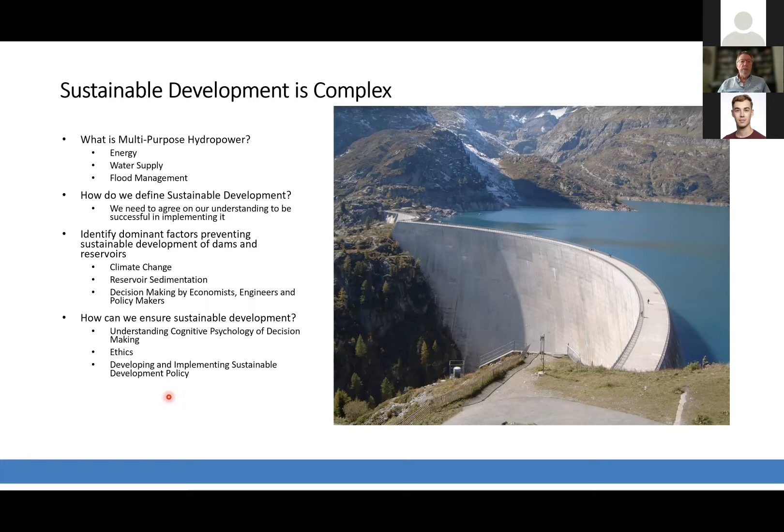So let's start with what is sustainable development. The most succinct definition, in my view, was developed by the Brundtland Commission of the United Nations when they developed the Our Common Future Report in 1987. It says that sustainable development seeks to meet the needs and aspirations of the present without compromising the ability to meet those in the future. So it focuses on what one can call intergenerational equity, which means fairness between generations. And environmental preservation, from this point of view, is a desirable consequence of sustainable development. It's not the objective. Okay? So to summarize, sustainable development is the harmonizing of engineering, environmental, and economic aspects of projects with the main focus of creating intergenerational equity, that is fairness between generations.

So now that we know that, the next issue that we need to discuss is how do we sustainably develop a resource. And as you may know, there are renewable resources and exhaustible resources, and the only resources we can really sustainably develop are renewable resources. And we can only do that if we use them at a rate that is smaller than the rate at which they are regenerated. So for example, here, mining can never be sustainably developed because that's an exhaustible resource.

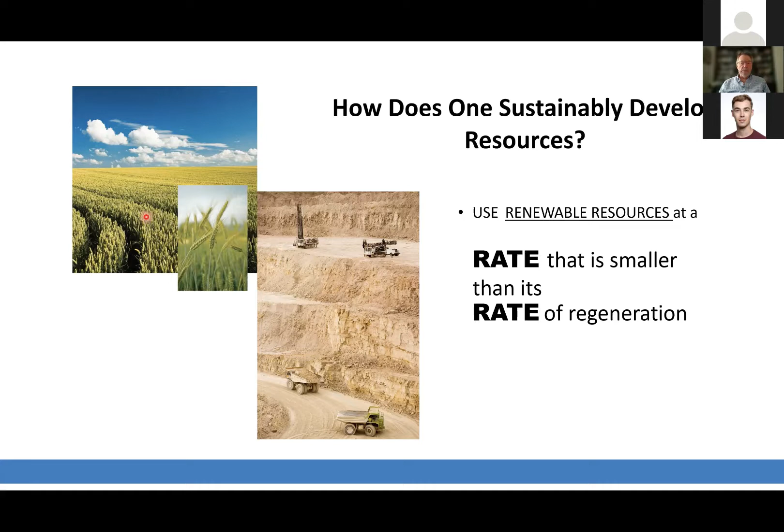Whereas if we plant wheat, we can sustainably develop that because it's a renewable resource. So then if we look at water, fresh water, if we look at the fresh water supply and also the issue of generating power with water, we want to ask, well, is this a renewable or an exhaustible resource? And to get some idea of how much water we have on Earth, we can compare the amount of water to the diameter of the Earth, which is

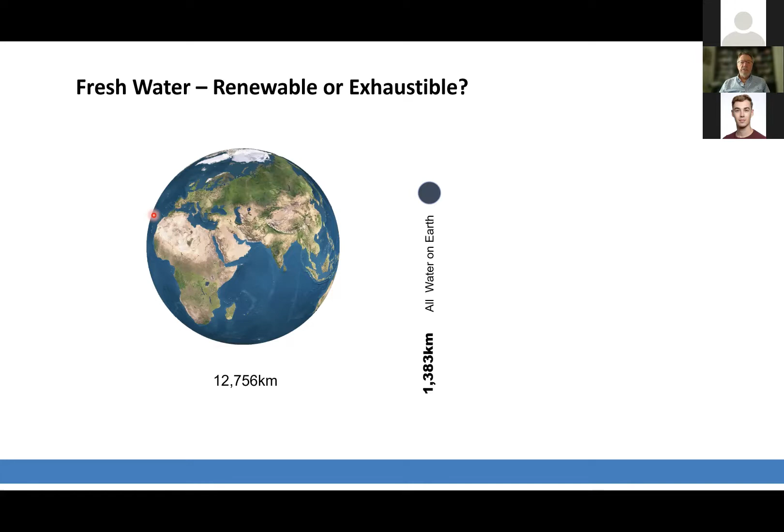12,756 kilometers. And if we take all water on Earth, in the oceans and the ice caps, everything in groundwater, and we put that in a sphere, it will have a diameter of 1,383 kilometers. So that's a small amount. And there's only so much water on Earth, so that really can be viewed as an exhaustible resource. But what we are generally interested in is fresh water.

So if we take all the fresh, accessible groundwater on Earth, and we place that in a sphere, it will fill a sphere with a diameter of 69 kilometers. And if we take all the river water on Earth, and we place that in a sphere, it will be a sphere with a diameter of only 16 kilometers. So that's not a lot of water. But the good news is that we can view it as a renewable resource because of the hydrological cycle.

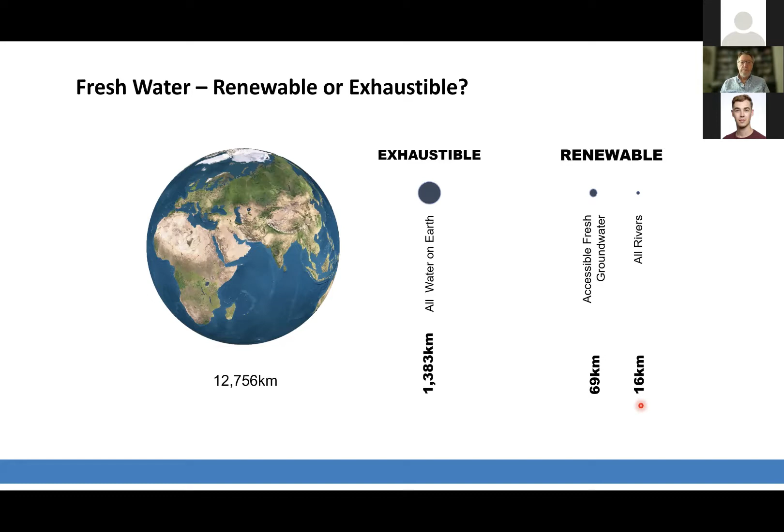So then the question is, if we want to sustainably develop the freshwater resources, which one of these two has the greatest potential for sustainable development? So to answer that question, we now come back to that whole question of what is the rate of replenishment of these two resources, and how does that compare to the rate of usage?

So if we look at the two resources, we can use the residence time of water in those resources as a proxy for their replenishment time. So residence time is the time it will take a drop of water to move through the entire resource from its origin to its final end. And if we take all the fresh groundwater on Earth, the residence time for that is 1,400 years. What that means is if we were able to magically remove all fresh groundwater on Earth in an instant, it will take 1,400 years for it to replenish.

On the other hand, if we look at river water, the residence time of river water is 16 to 18 days. So what that means then, if we were magically able to remove all the river water on Earth in an instant, it'll be back in about 2 weeks. Okay, so that's the residence times. And then if we now compare it to our usage of water, which is daily, just from a visceral point of view, we can see that because the replenishment time of groundwater is so much longer than the daily usage time of fresh water, it must probably be more feasible to develop river water. The replenishment time and the daily usage time are roughly on the same scale.

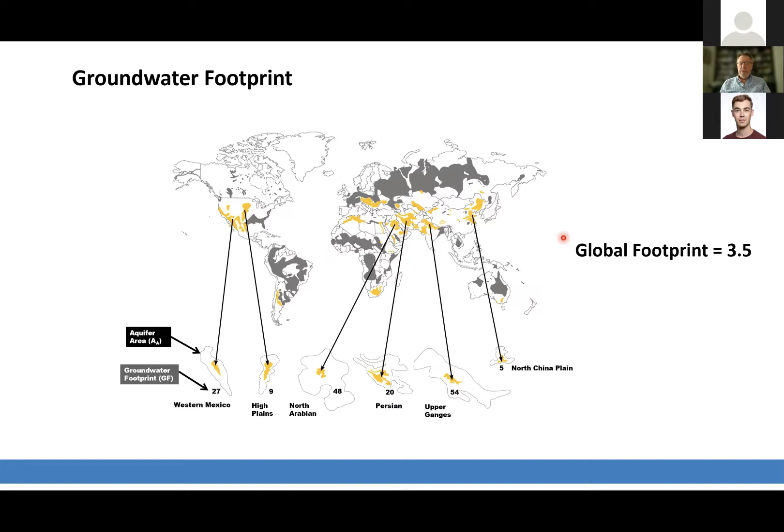And although if one just looks at this map, it looks like the non-overutilized groundwater resources are much larger than the overutilized ones, we can then look globally, and the global footprint is 3.5. So what this means is that globally we use 3.5 times more groundwater than what is replenished on an annual basis. So from that we can, I think, conclusively say that river water has a greater potential for sustainable development because groundwater is already overutilized.

Now, what do we do to address this issue? In rivers, we build dams, and the whole intent of a dam is to create a reservoir behind it so that this variable inflow into the reservoir can be controlled or regulated so that we can supply power and water reliably downstream.

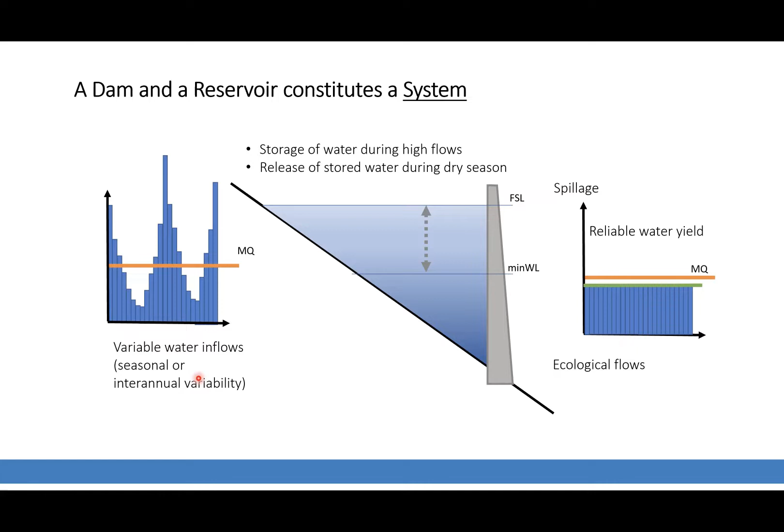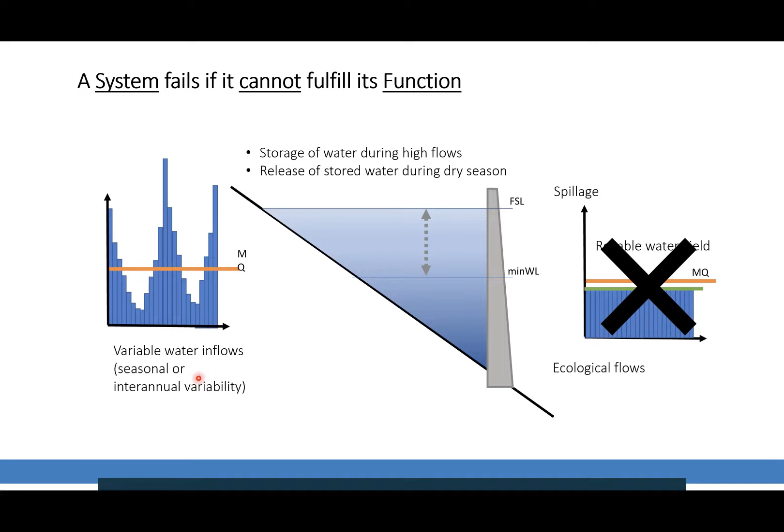And if we look at the system as a whole, we have a dam and a reservoir. That is the system we are looking at. There are two failure modes, okay? And if this system fails, we cannot provide its service. So the first mode is the dam fails. So if the dam fails, it's no more here. We cannot store the water anymore, and we cannot provide the services that this facility was built for.

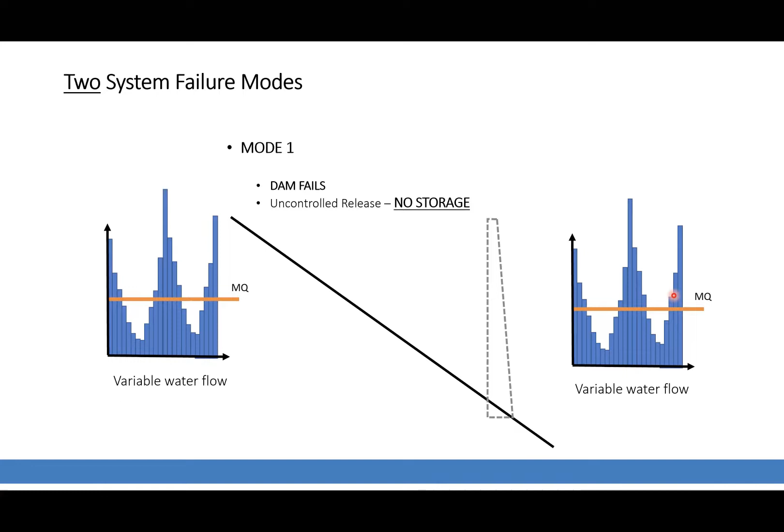The second mode is that the dam may stay in place for many, many years, but we fill the reservoir with sediment, and we don't have any more storage space for the water, and again, we fail to provide the services that this facility was built for. So those are the two main failure modes.

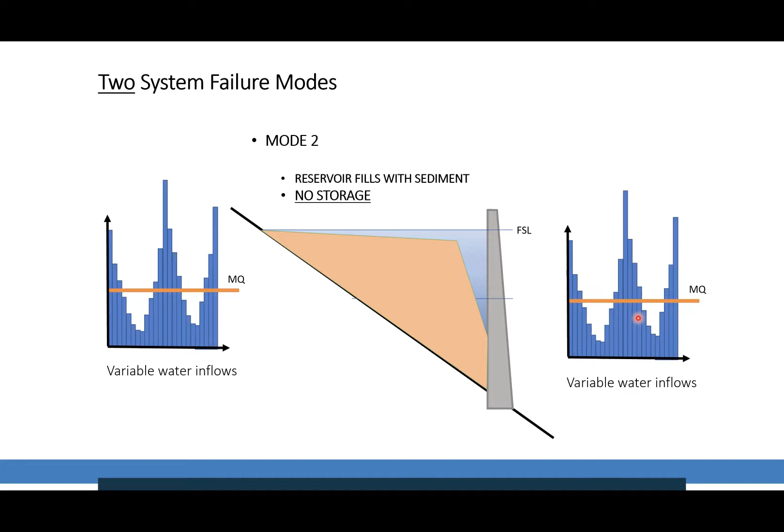So what is our goal? Our goal is to develop sustainable infrastructure. And as indicated previously, how do we accomplish it? We focus on creating intergenerational equity. And this is done by maintaining the reliability of the services provided by the infrastructure, both now and in the future. And we manage the deterioration of the infrastructure. We make sure the dam stays in place, and we prevent storage loss.

And then obviously climate change comes in that we have to take account of. And there are many uncertainties associated with that. And to deal with these uncertainties, we have to develop resilient infrastructure. So let's first look at climate change. The two principal variables that we are interested in when we want to reliably supply water and power are changes in the mean annual river flow caused by climate change. And the second very important one is the change in hydrologic variability.

So if we look at predictions into the future, there are many studies that have been done. This shows an indication of how mean annual flow will increase or decrease throughout the world. So these blue ones here are the places where it will increase. And then the red and brown ones are places where it will decrease. So with you being in Europe, that is the prediction for Europe, that it will most probably decrease. That's just the mean annual flows.

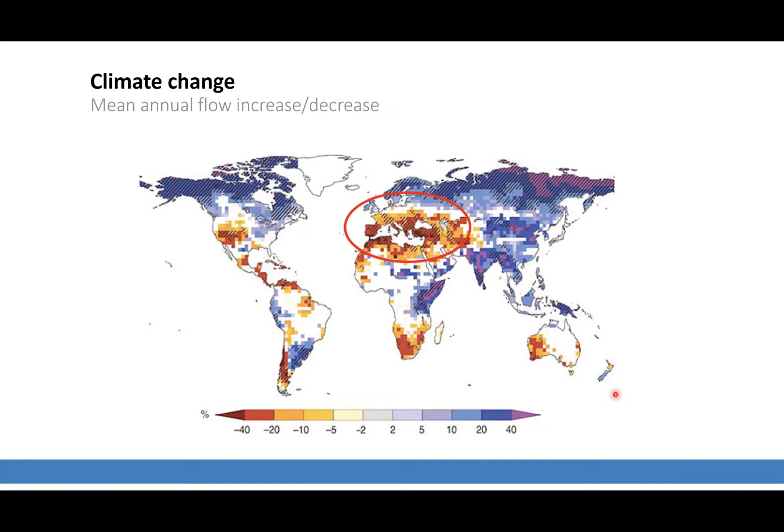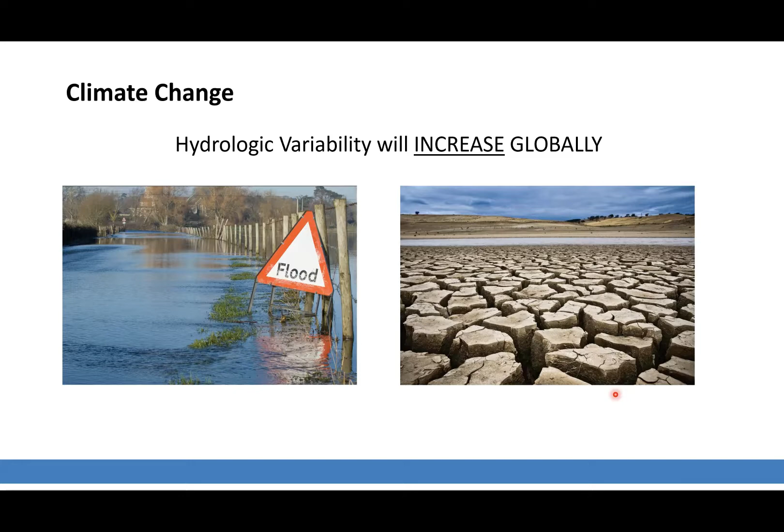If we look at hydrologic variability, the general agreement between all scientists is that hydrologic variability will increase globally. It's not an increase or decrease, it's just going to increase. So let's look at what the impact of such an increase might be. This here is a map of the world, and all these areas in gold here are places in the world where multiple year droughts occur. That is, droughts of 2 years or longer.

For example, I'm originally from South Africa, and when I grew up in South Africa, my memory of water supply is we were always under restrictions, and we generally would have droughts lasting 5 to 7 years on a regular basis. If you look at Europe, at the moment, it's only Portugal and Spain that really have this problem.

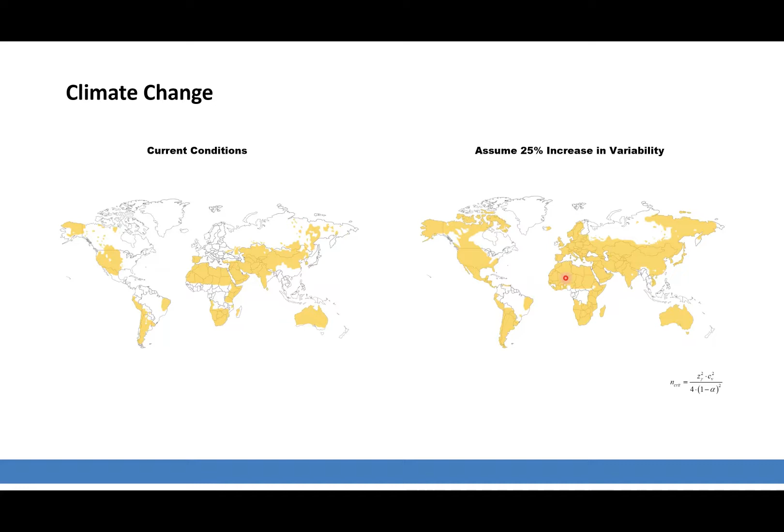But if we now make an assumption, I just made an assumption, just say generally that hydrologic variability will increase by 25% over the entire world. What will happen to these areas? And if we do that, we notice that there's a significant increase in the size of these areas in the world where droughts over many years will occur, multiple year droughts. And if you look at Europe, you can see there's probably something that you'll have to take account of in your future. Okay.

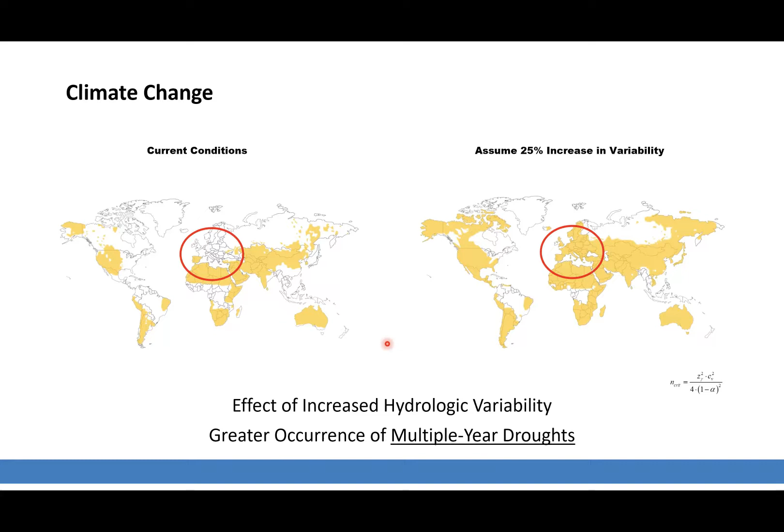So what does it mean? How do we prepare for this issue if we look at climate change? Now we can prepare a graph. On this graph, on the ordinate, we have the yield from a river or a dam and reservoir that we have in the river. And it's expressed as a percentage of the mean annual flow in the river, 0 to 100%. And on the abscissa, we plot hydrologic variability. That is the annual coefficient of variation of flows in a river. And this is the proxy that we use for the effect of climate change.

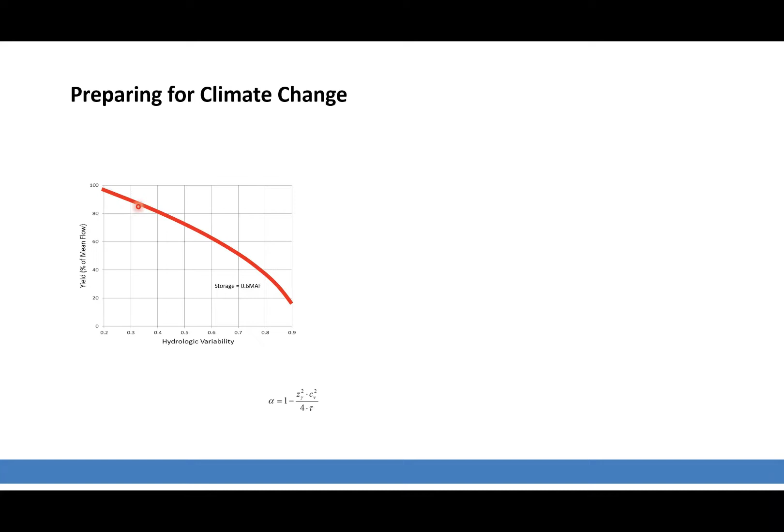So if we would build a dam in a river with a reservoir that has a volume of about 60% of the mean annual flow in that river, the relationship between hydrologic variability and yield will look like this. Okay. So if we start off with the average hydrologic variability in the world, it's about 0.3. So we start at a hydrologic variability of 0.3, and due to climate change, it increases to 0.6. You can see that the amount of water that we can reliably get from this dam and reservoir drops significantly.

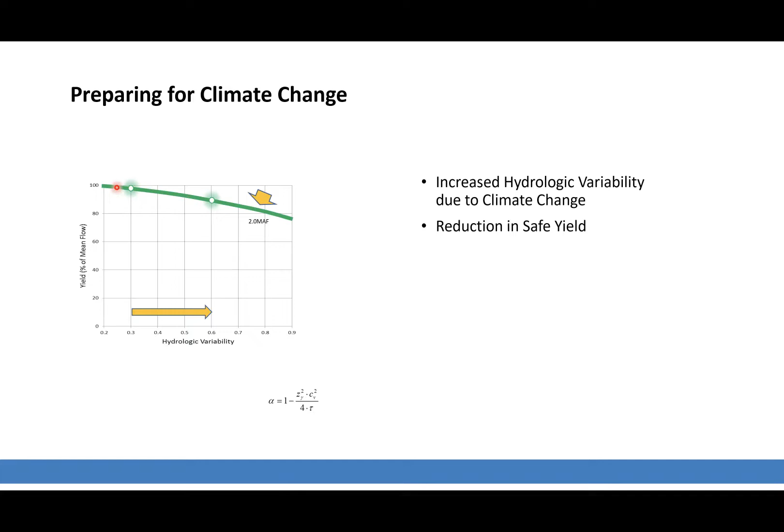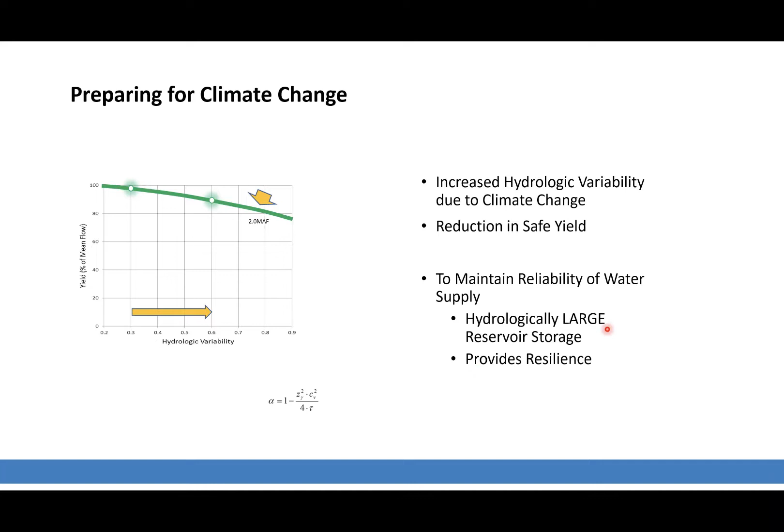So if we now build a reservoir that's got a larger volume of 1 times the mean annual flow, you can see that the reduction is less. And if we build it even larger, say 2 times the mean annual flow, it's much less sensitive to the effects of climate change. So just as a general rule, what I'm going to try and do is create as large as possible storage in rivers so that we can reliably supply water, and that provides resilience against climate change. Okay? So large reservoir storage provides resilience.

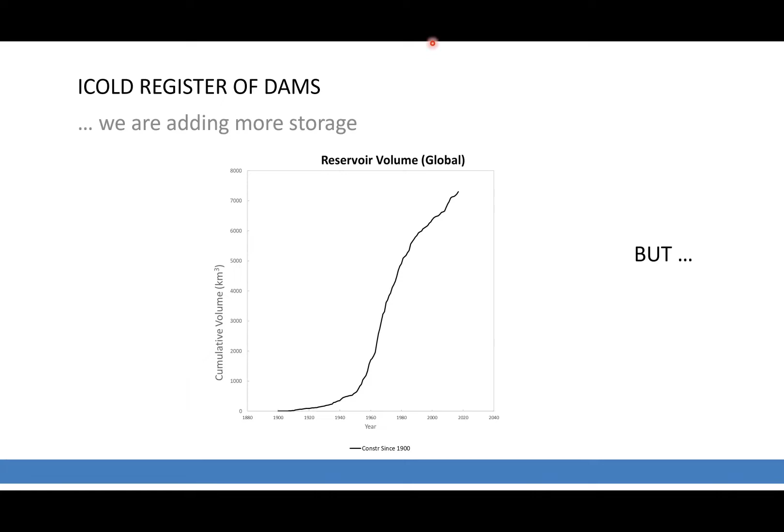So now what happens globally? If we look at the construction of large dams throughout the world from about 1900 to 2020, what you'll notice is that we continuously build reservoirs and the global volume increases. So that sounds like a good idea. Okay, we said with climate change, we need more storage. But the thing is that there's something called reservoir sedimentation.

So the question that we need to ask then is, we have climate change that's giving us a reduced reliability of water supply. And if we now also look at reservoir sedimentation, what is the combined effect? So if we only have climate change and a reservoir, say that we've built that has a volume of 2 times the mean annual flow, there is a small reduction in yield that will occur because of that.

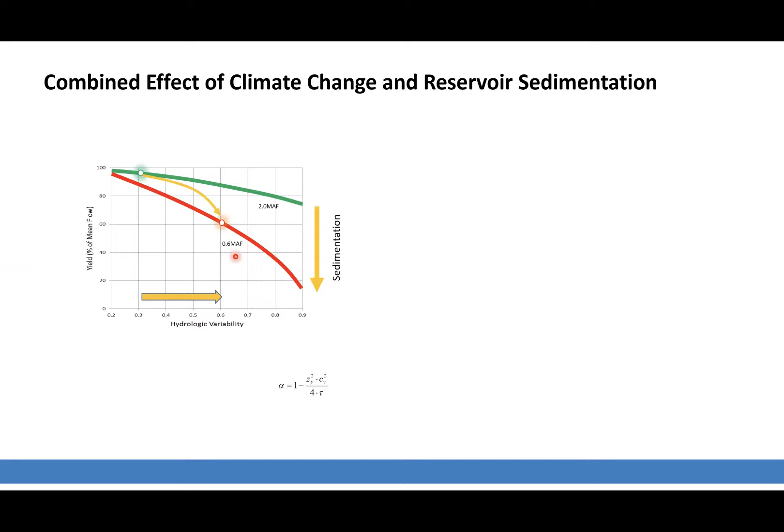But if this reservoir volume decreases significantly due to sedimentation, and say goes down to 60% of the mean annual flow, then our yield reduces to about 60% of the mean annual flow. So you see that's a significant reduction. So the combined effect of climate change and reservoir sedimentation provides us with significant problems.

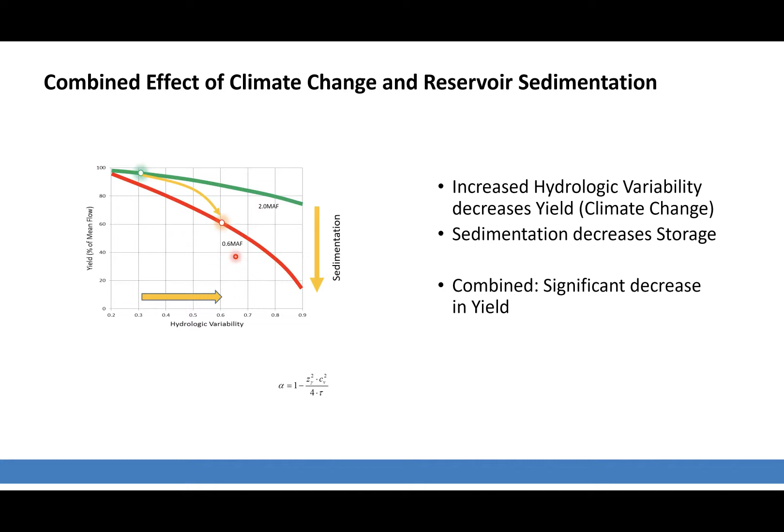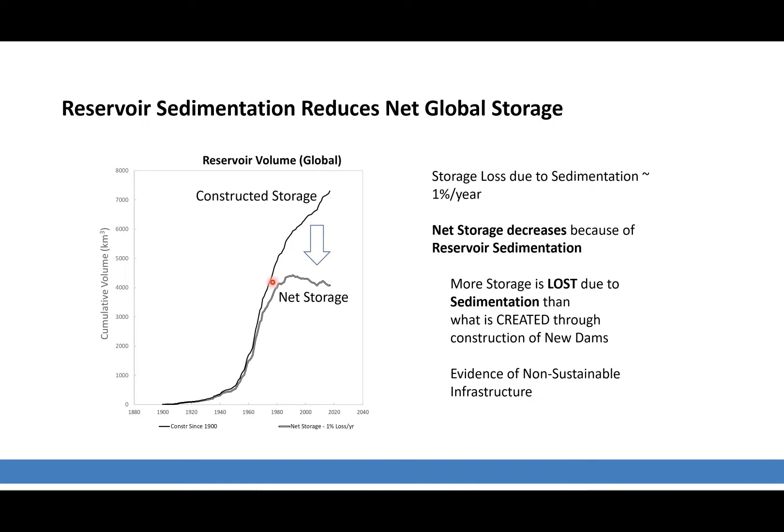So if we now look globally, what happens if you take account of reservoir sedimentation? You see this is the constructed volumes that have been developed over the years. And generally, estimates are that we're losing about 1% of storage per year of all the reservoirs on Earth. And if we account for that, you can now see that the net storage that's available for us to use is actually decreasing over time. And that we are losing more storage to reservoir sedimentation than what we're adding by building new dams. So this is a problem that we need to deal with.

Now, this storage loss is really unnecessary because we have various technologies to manage sediment, and they have been implemented. And I'm not going to deal with that in any detail. That is a lecture in itself. But they can be classified as catchment management. In other words, we reduce the amount of sediment that will flow into a reservoir by preventing erosion in the upstream catchment. We can route sediment through reservoirs.

In other words, if we have a river flowing into a reservoir with a large amount of sediment, we create flow conditions within the reservoir so that you can pass that sediment through the reservoir. And this here is an example of it. This is Xiaolangdi Dam and Reservoir in China. And they are passing here sediment through the reservoir and preventing it from settling in the reservoir.

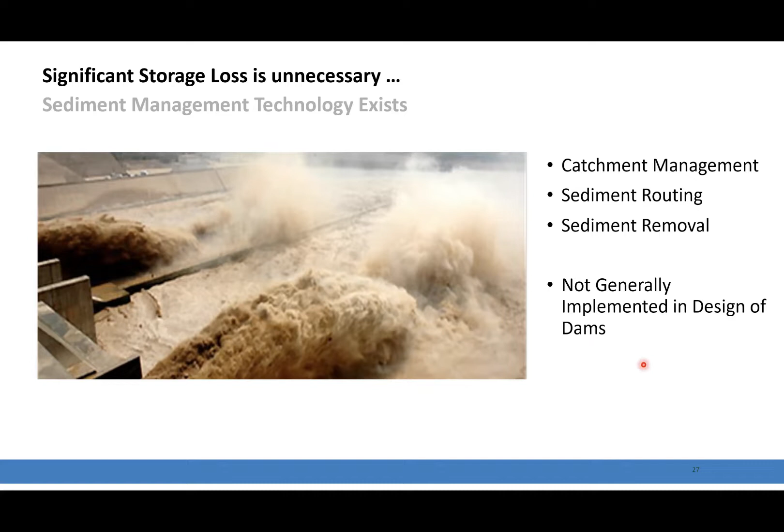And then there's a third group of techniques, which is sediment removal. So if we already deposited sediment in reservoirs, there are techniques that we can use to remove it. But the sad thing is that this is generally not implemented in engineering design. Okay, this is a condition if we don't implement it, which is currently the case. But if we would implement reservoir sedimentation management, we may not be able to preserve all the storage, but we can at least preserve a significant amount of storage and ensure benefits for future generations.

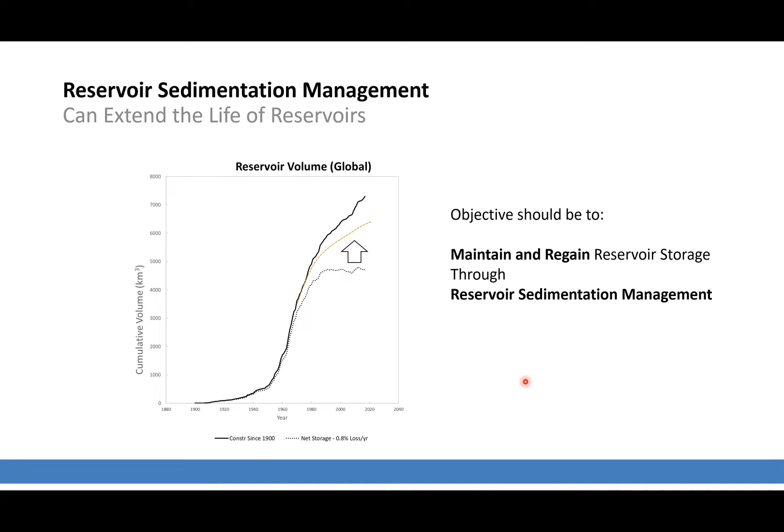Now, the question is, why are we not doing this? And the real reason is irrational decision making. And this irrational decision making leads to non-sustainable development. So let's look at this. Generally, assumptions in economic analysis is that we as humans are rational beings. That's the assumption. And we make decisions based on rational thought. Okay.

Now, a lot of research has been done by Kahneman, who won the Nobel Prize in Economics a few years ago. And what he and his colleagues researched found that we are, as humans, not rational. We base our general decisions on irrational thought. And then he also said, well, this can be changed. They made this a very extensive research and said there are really two systems of thinking in human beings. One is subjective thinking, which is normally used, and the other is rational thinking, which is seldom used. And the reason why we seldom use this is because it requires additional effort.

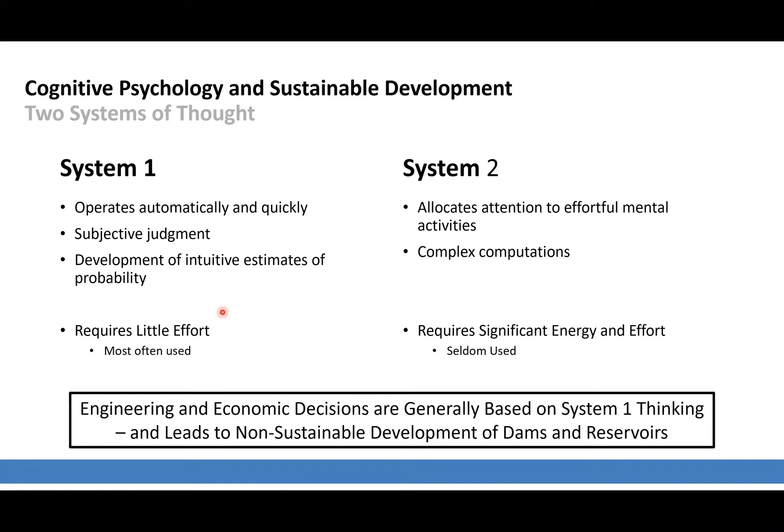Okay, you can also just think on the whole concept of climate change in general. Well, why are we struggling so much? So let's just look at the characteristics of thinking. There's a theory by Kahneman called prospect theory. And what it essentially comes down to is he compares actual gains and losses. So these are actual gains and actual losses to how we psychologically interpret the utility of those gains or losses. And what he found is that the relationship has an S-curve like this.

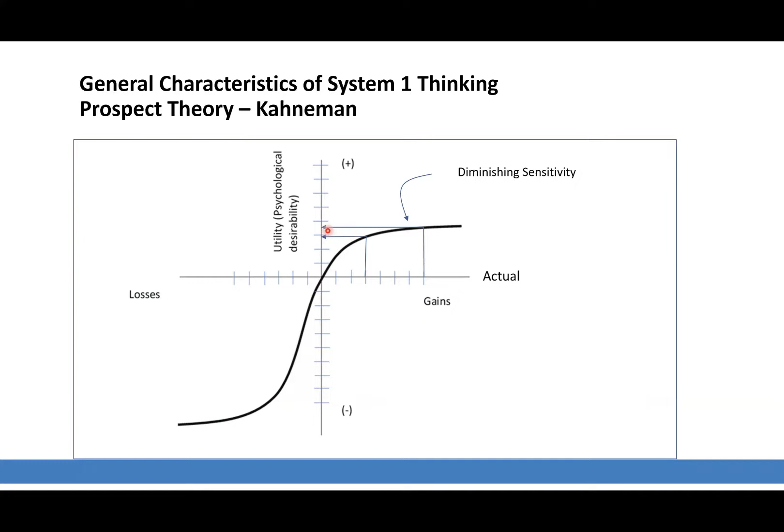So the first thing is that the way that we psychologically interpret actual gains and losses differ. So for example, here we have 4 units, say $4 million of gains, and psychologically we only give it the desirability about 3 units. Whereas if we would then say, how do we experience 4 units, $4 million in losses, that is significant. Okay, so there's this whole issue of loss aversion. That's the first thing. The second thing is that as our gains increase, the way that we experience the desirability of those gains decreases. It's called diminishing sensitivity.

Now, on average, there are 2 things we need to do. Firstly, we often have to decide between a loss and a gain. Okay? And because of the way that we psychologically experience, say, a $4 million gain versus a $4 million loss, we have what is called risk aversion behavior. So we select to rather go with the gain, okay, because we experience it differently.

For example, say we have a dam in place that would cause a gain, that we don't have damages to property to the value of $4 million. The way we experience it is that we experience it as say 3 units here. But if we didn't have the dam and we lost 4 million, it will be tremendous losses. So what we do go for is we go for designing this dam and protecting us against floods.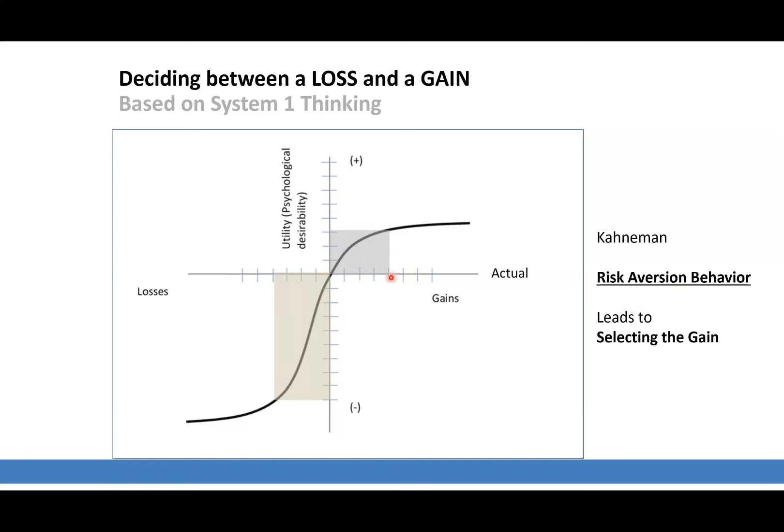But in the case that we are looking at here, whether we should implement reservoir sedimentation management, we have to decide between 2 losses. Okay. So we are operating in this area here. We're not looking at gains at the moment.

So what he found is that if we have a small but sure loss over here somewhere, and we have to decide between getting that or a large probable loss in the future, something that may or may not happen, generally we have what's called risk-seeking behavior, and we generally select this large probable loss.

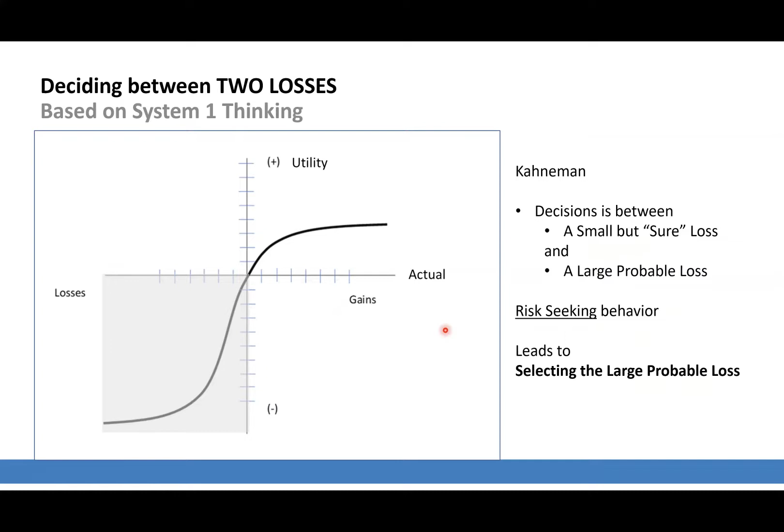Okay, so now let's look at this in the problem that we are looking at. So we are looking whether we should implement reservoir sedimentation or not. We must decide between 2 losses. The one is that if we implement it, we're going to have additional cost, and our water supply may be slightly less because we have to do things to the reservoir. It's going to provide less water on an annual basis.

But if we implement this reservoir sedimentation management approach, we can preserve reservoir storage over the long term, and we can ensure that future generations can get water. So we're creating intergenerational equity. The second alternative is not implementing reservoir sedimentation management, so there's no additional cost. And we can perceive in the short term, well, we're going to have more water. And from a short-term point of view, we say, oh, that's certain.

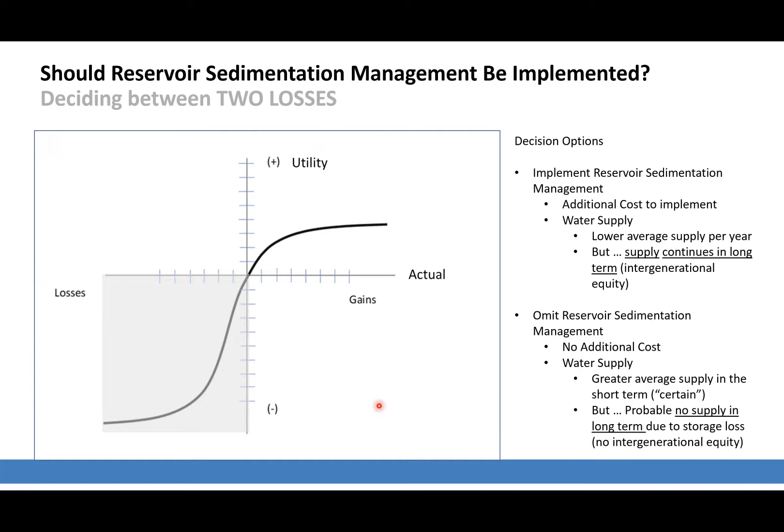And the fact that we will only have a probable loss in the future, that's how these people reason, is not really of a concern to us. And it doesn't create intergenerational equity. So how do we look at these 2 things? If we implement system 1 thinking, which we normally do, we use this concept of time preference, which you have studied, I'm sure, in your economic analysis classes.

And what we say is, well, right now, I'm certain I'm going to have a lot of water available, and it's valuable to me. And future generations, they may or may not have water, but I'm not really concerned about that. It's a large probable loss. It's not certain, but because my time preference is to satisfy my needs right now, I do not worry about that.

So what it comes down to is that the large probable loss in the future, I'd rather select that and then go with this water I can have right now. So in a case like this, I'll decide not to implement reservoir sedimentation management. I select to rather have this large loss in the future. These are future generations, and it doesn't concern me.

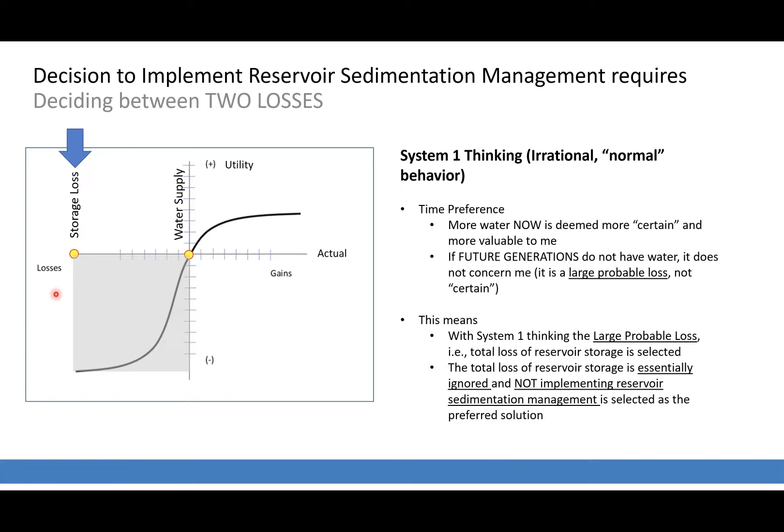If you view it from a system 2 point of view, what we now do is say, well, time preference is not that important because I really want to look at what happens in the future to future generations. So right now, I'd rather accept a little bit less water. So there's a small loss here that I'm experiencing right now. I can implement reservoir sedimentation management because of that.

And because I'm preserving storage, I only have a smaller loss, I can now ensure that future generations will be able to have water from the system in perpetuity. So what I'm doing is I'm creating intergenerational equity, which means that I am following a sustainable development approach.

So this means that for system 2 thinking, we have to implement more mental effort. We have to analyze how we can manage the sediment. We're going to have some water losses here, and what we really want to do is to optimize the benefit-cost ratio. So from a system 2 point of view, rational thinking, this is what we would go for.

So let's just summarize. In system 1 thinking, they don't really put in a lot of effort, and they just have a subjective feeling of what the storage loss might be in the future, and they essentially ignore that and go for this system here where they can lose storage in the future and not create intergenerational equity. It's not a sustainable development concept.

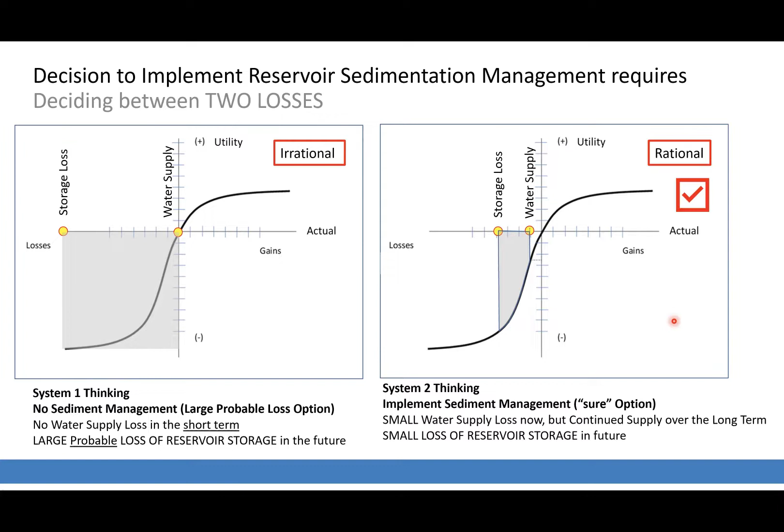Whereas in the rational approach, we accept a small loss of water here, we manage sediment so that future generations can still get water supply. So that's irrational, and the other one is rational, and this is really what we need to go for, what we normally do not do.

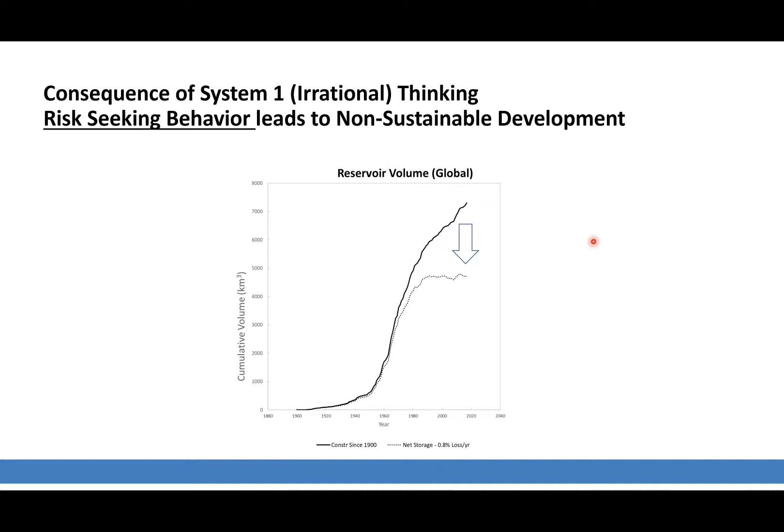So this whole system 1 thinking, the irrational thinking, leads us to where we are right now. We are building these dams. We are not putting in enough effort to preserve them in the long term, and we are losing storage, and it's not a sustainable approach to infrastructure development. So how does this practically come into play? Let's look at economic analysis.

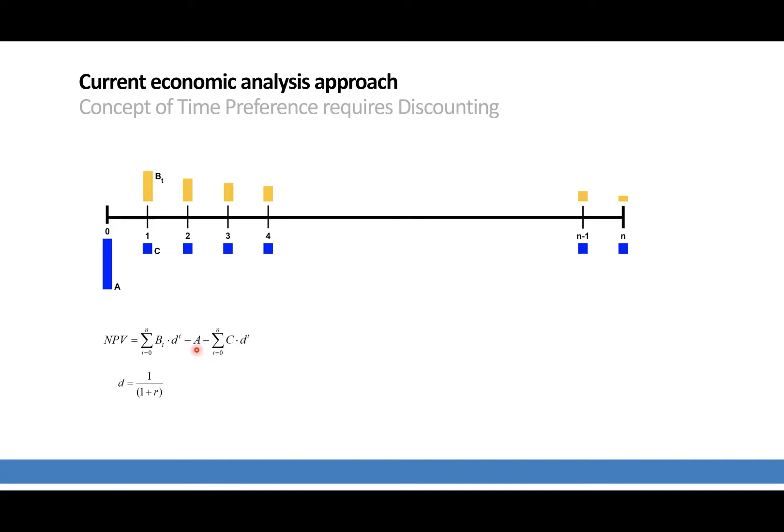And my understanding is that all of you have done this in your bachelor's degree, economic analysis. So the way we do that is we'll develop a cash flow, and this is the cost of building the facility, and this here is the cost of maintaining it, and then over time we have benefits that we have to take into account. So what we do is normally we discount everything so that we can come to a net present value, and this is the equation we use. So we discount the benefits, we discount the future cost, and we do not discount the construction cost because it's right in the beginning.

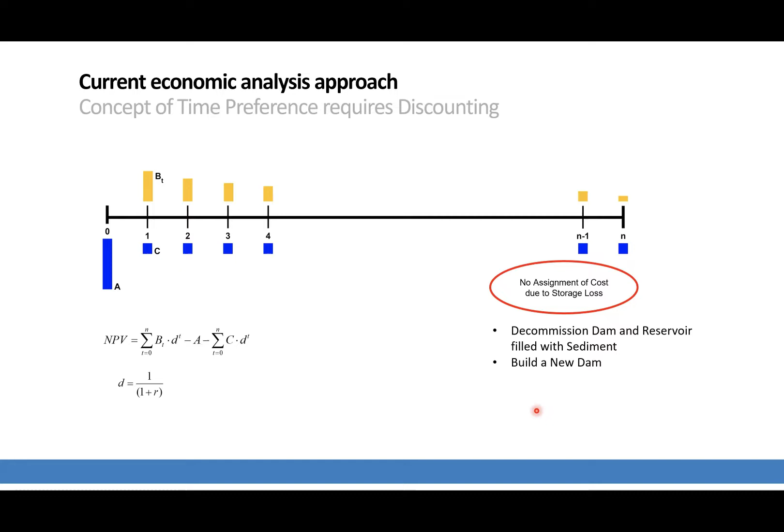But one thing that you'll notice when you look at the analysis of large dams and reservoirs is that the cost of losing the storage is never accounted for. And those costs, if a reservoir fills completely with sediment, you have to decommission it, and that decommissioning cost is hundreds of times more than the original cost of construction. Then you have to build a new dam so you can have water for your future generations. And the question is, why are these costs ignored?

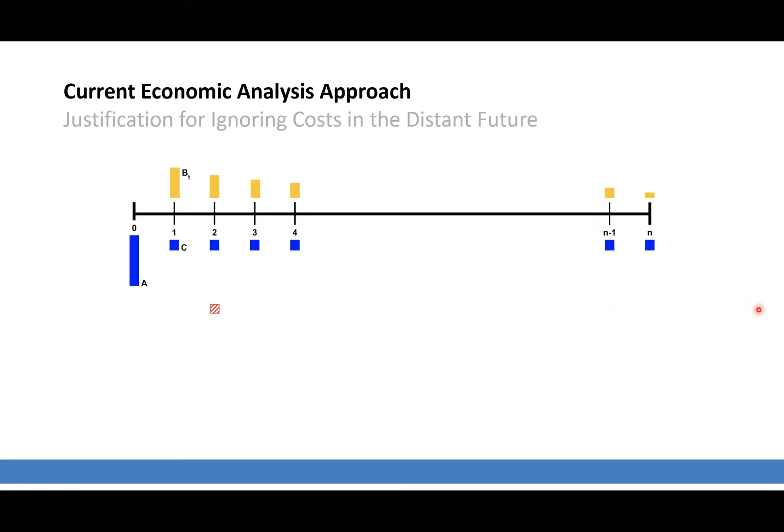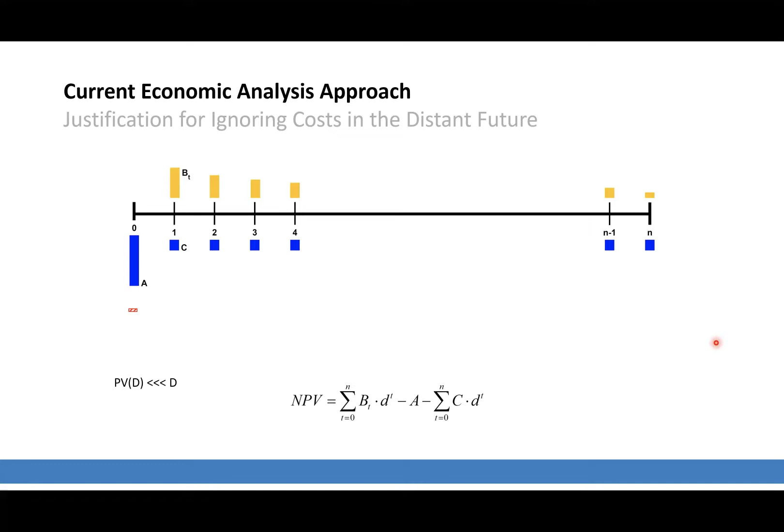So just to explain that in terms of discounting, if we would put the decommissioning cost in there and discount it, this high future cost really comes out to have a very small net present value. And that is why economists generally ignore these costs in the future. Okay. But that is not the correct way to do it.

There was an economist by the name of Hotelling in the 1930s that looked at this whole issue of developing exhaustible resources. And what he said is, if you develop an exhaustible resource and you want to analyze it economically, the value of this resource must increase at the discount rate over time. So if it increases at the discount rate and we discount it, this discounting doesn't really come into play. So if we would discount this cost using the Hotelling principle, its value remains unchanged, and this completely changed the way that we look at the resource.

So now, if we want to preserve reservoir storage space, we want to ask the question, is this storage space exhaustible or is it a renewable resource? And the answer is that reservoir storage space has a dual nature. If we decide when we design and operate the dam and reservoir to allow it to fill with sediment, then we classify it as an exhaustible resource. On the other hand, if we design and operate it in a way that we can preserve the storage, in other words, we manage the sediment, then we classify it as a renewable resource. So this is really a decision made by the designer. The designer decides whether a reservoir is renewable or exhaustible.

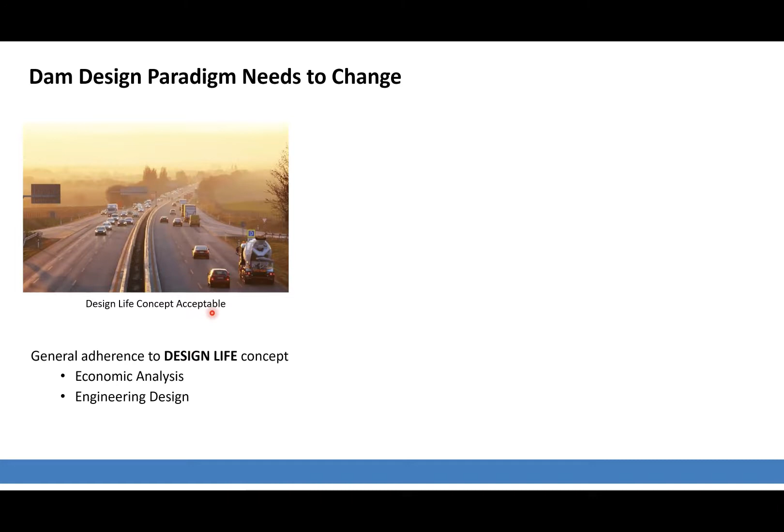So the second thing that comes in now is the whole concept of engineering design. And in engineering design, there is a concept known as the design life. So let's say, for example, we design a highway, we can have a design life of 15 years, and we do the economics and see it's economically viable. And after 15 years, we can resurface this highway, and we can essentially use it in perpetuity. So we are creating intergenerational equity with this. So for normal civil engineering design, that is acceptable. But when it comes to dams, it is not.

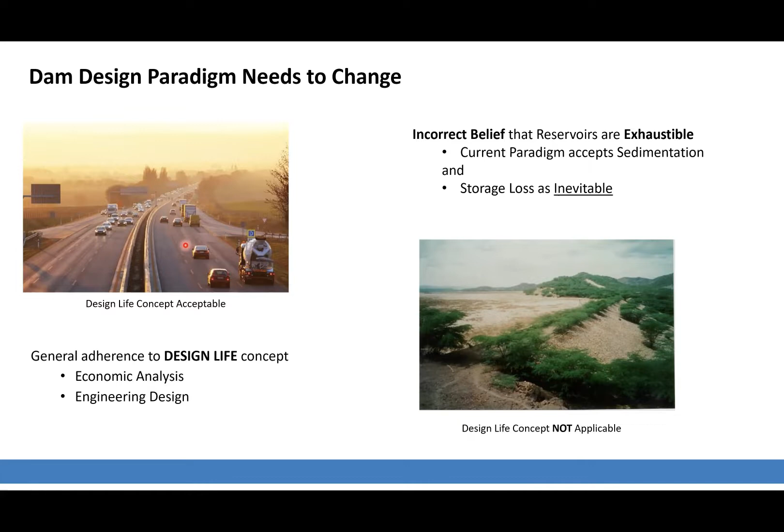So this whole design life concept that we use, for example, to design conventional civil engineering infrastructure is not applicable when designing dams. So really what one has to do is look at these concepts. Traditionally, with this design life paradigm, we assume the reservoir is going to fill with sediment and it's going to have a limited life, and we have to decommission it at the end of its life and build a new dam.

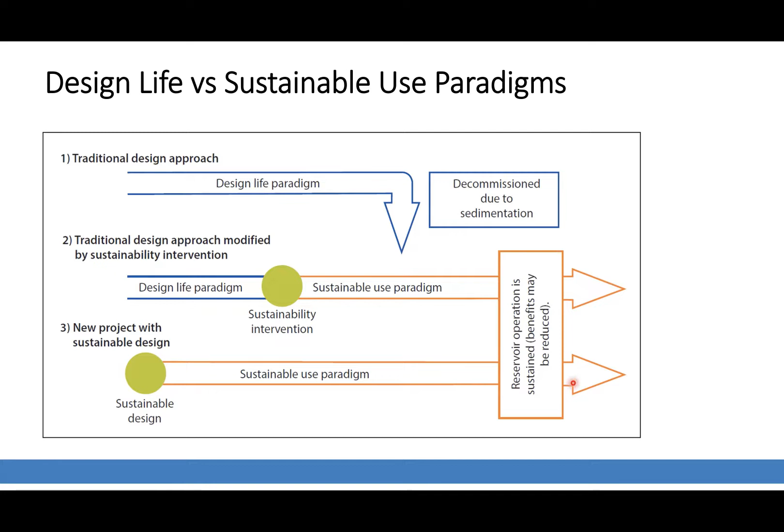What one should really do with all these current facilities that have been designed with the design life paradigm is to create some intervention so that we can manage the sediment and preserve the storage space, so that over the long term, future generations can continue to use it. And when it comes to new projects, we have to develop sustainable designs so that we can continuously use that storage space over the long term. That is where we are striving towards.

So what do we do? What is the road ahead? Firstly, we need to adopt a sustainable development approach. So what we really want to do is to develop projects that create intergenerational equity. Secondly, to accomplish that, we have to change our behavior. And we have to implement the findings of cognitive psychology and make sure that we adopt System 2 thinking as standard practice. And doing that, we can develop, adopt, implement sustainable development policy, and we can develop and accept professional codes of ethics that will help us to stick to this System 2 thinking.

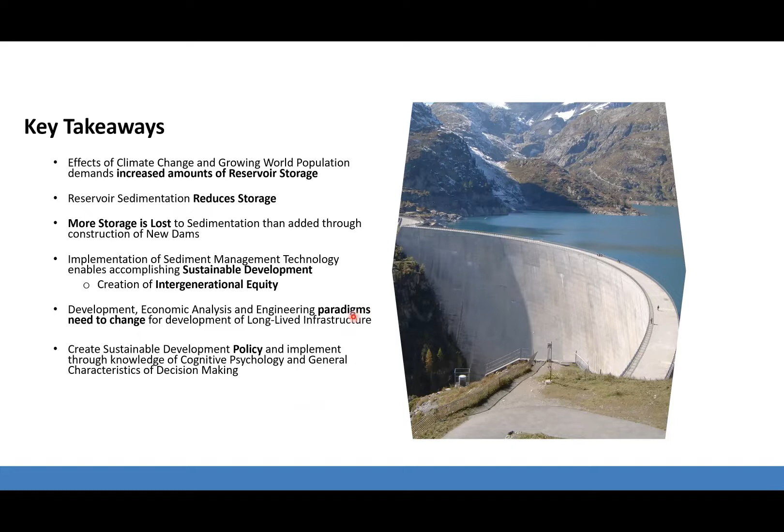So with that, I want to say thank you, and I hope we can create some discussion here. I trust that I have stimulated your thoughts and perhaps created a different view of how you view sustainable development.